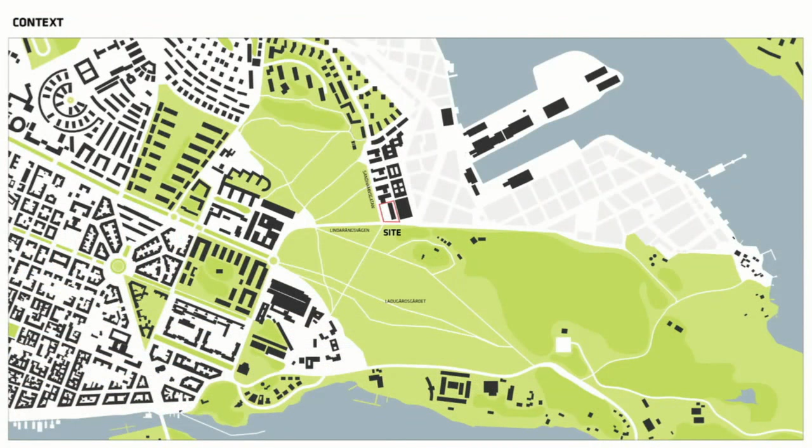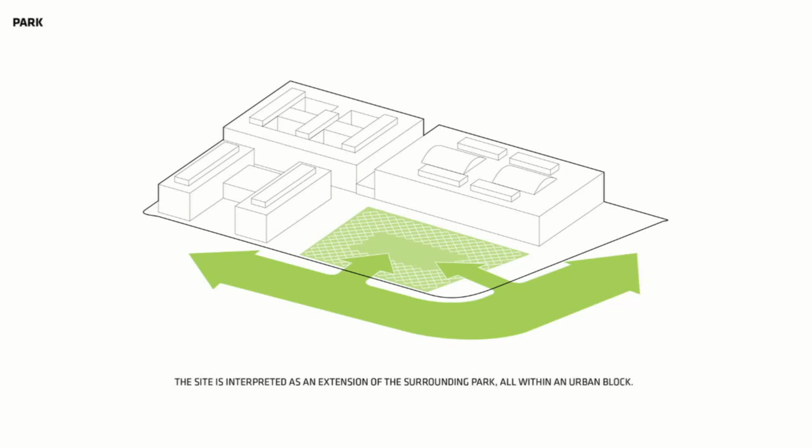And of course, I'm very happy to be here because after 18 years of practice, we have finally built a building in Sweden, thanks to Oscar, who called us 7 years ago and asked us to take a look at this incredible piece of land surrounded by Gärdet Park on two sides, city on two sides. It became very simple that we wanted to try to make a new kind of neighborhood, a new kind of city block that combines the qualities of the park with the qualities of the city.

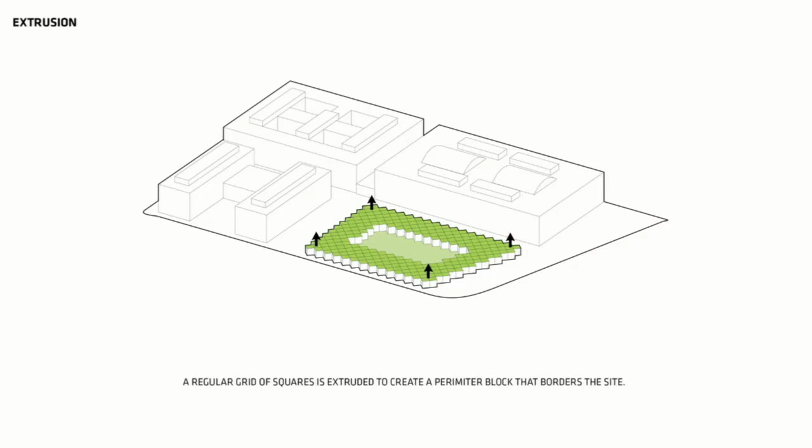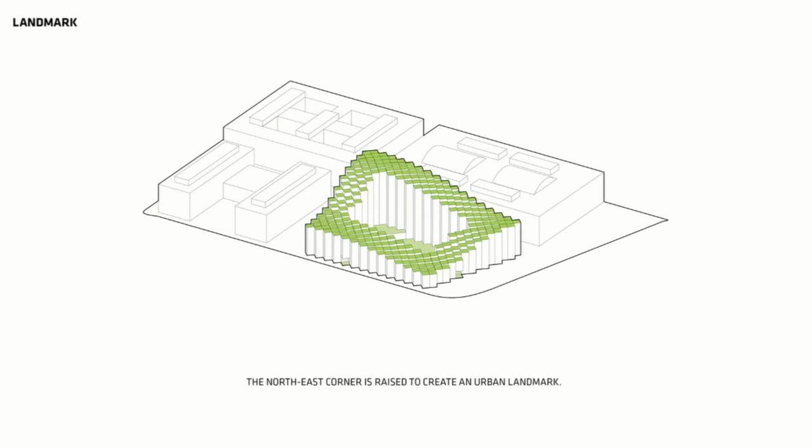So we came up with the idea of this sort of rotated grid, a grid of rooms. The rooms are rotated 45 degrees, allowing views up and down the streets. Passages allow a shortcut across the corner. And then we proposed to push down the southwest corner, lifting up the northeast corner in return, allowing us to flood the courtyard with daylight.

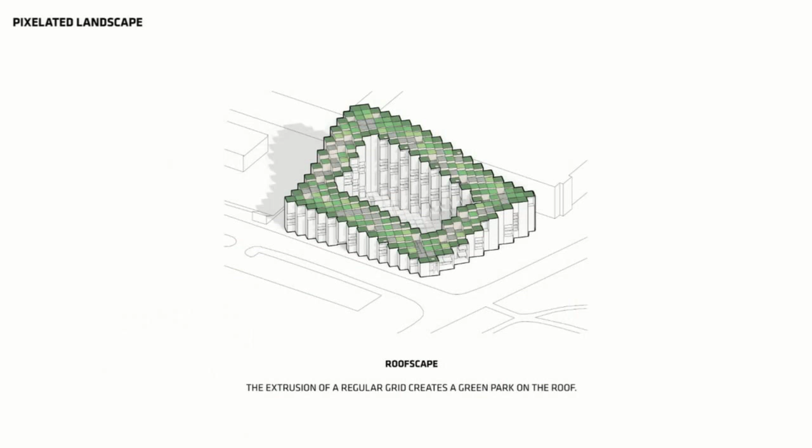This is what it looks like today - a gentle, lazy, sloping landscape. You have the gardens along this cascading landscape, and you have the oasis protected from the wind inside.

Everybody ends up getting a really joyful view over the Gärdet, over the forest, the hills. The landscape is not just visual, it actually has these cascading terraces. Inside, the courtyard becomes an oasis open to the sky, dipping down so you get an abundance of sunlight. And this is also the home for a kindergarten.

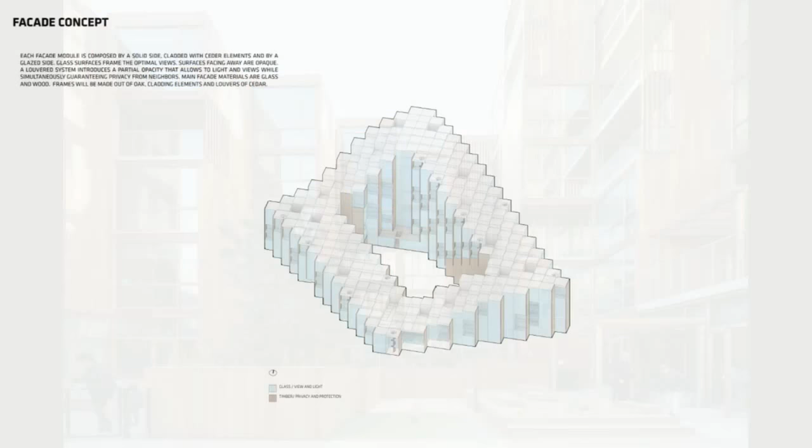For the facades, of course, they have different orientations, and we wanted the zigzagging to create a certain intimacy. Instead of being like some kind of address in a big block, you have your own little niche. Each balcony has its own little surroundings, responding to the attractiveness of the views and the exposure to the sun.

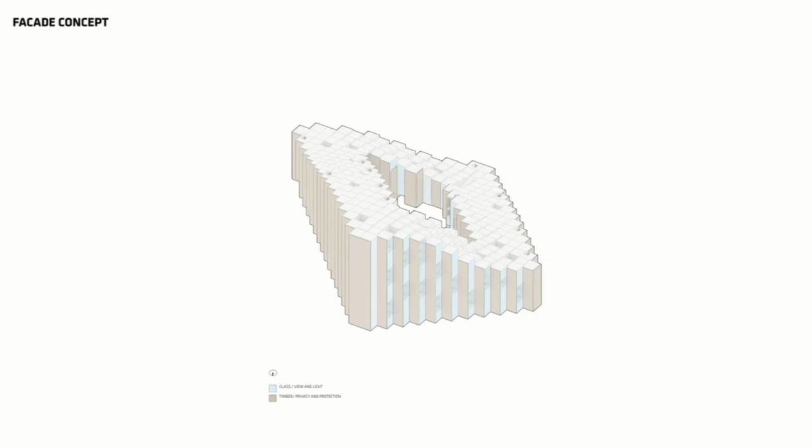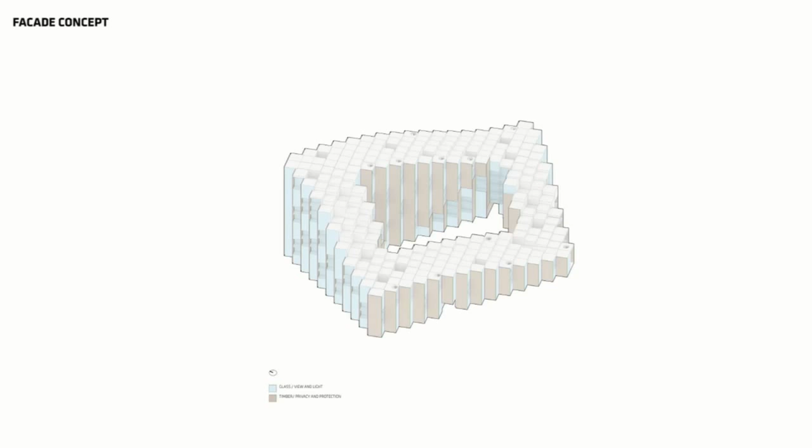For instance, from the northeast, it's almost entirely opaque. Even so, all of the facades are roughly 50% open, distributed to match the surroundings. Also in the courtyard, to avoid vis-a-vis, you get this kind of shade running across the facade. The closer you get to the corner, the more the nice view becomes the other direction. So here you see some of these situations.

And the facade is entirely clad in wood. We like the idea of combining elements that you normally see as opposites, like the countryside and the city side. When you go to the countryside of Sweden, all Danes from Copenhagen have a country house there, including my parents, and they're all made of wood. So we thought it could be interesting to apply this material, normally seen at small scale, to the city scale.

Sometimes the louvers are turned to allow views from the balconies while retaining privacy. But of course, from the southwest, the facade is almost entirely glass.

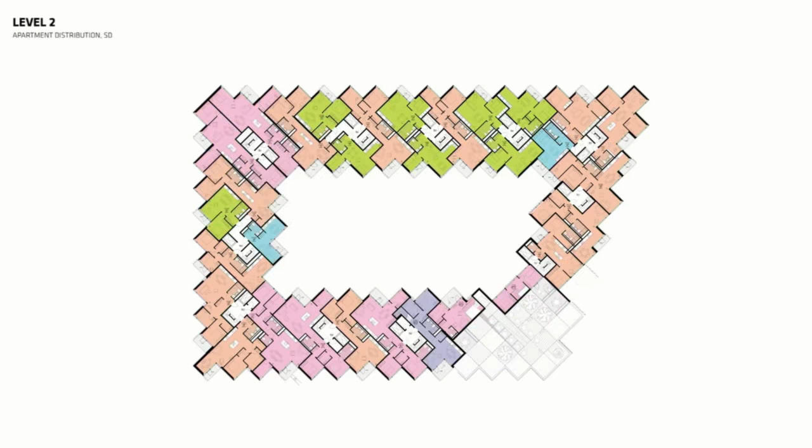So basically, when you look at the plans, in all this organic appearance, it's actually incredibly rational. It's like a single module repeated indefinitely. But as a result, you get apartments with an almost quirky character. Quite often when you move into a newly built apartment, it's so simple that it's almost like a cardboard box. It lacks character and diversity.

Here, with access to the outdoor spaces, you can see the steel is actually exposed inside, so you have the quirkiness you find in a loft converted from industry to living, similar to our own office. There's the warmth of light filtered through the wood, and even a certain verticality. Many of the apartments are duplexes, and some have access to the roof through these spiral stairs.

So essentially, you end up inhabiting a hybrid part of Stockholm that is half landscape, half city. And I think maybe the one image that best captures the intention of the project is this image on a day similar to today, where you can hardly see where the natural landscape, the rolling hills and the forests, become the city of Stockholm.

Before I leave it over to Reinier, I thought it could be interesting to run through some of the subjects or challenges that we've been dealing with over the last decade and a half at BIG.

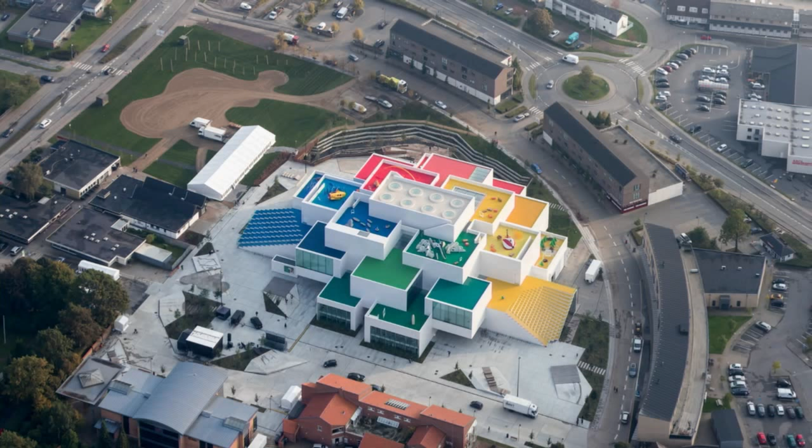We recently completed the home of Lego, the Lego House. The success of Lego is that everybody thinks Lego is from their own country, but it's not, it's from Denmark. We tried to make the house as Lego-like as possible, to make it interactive and inviting.

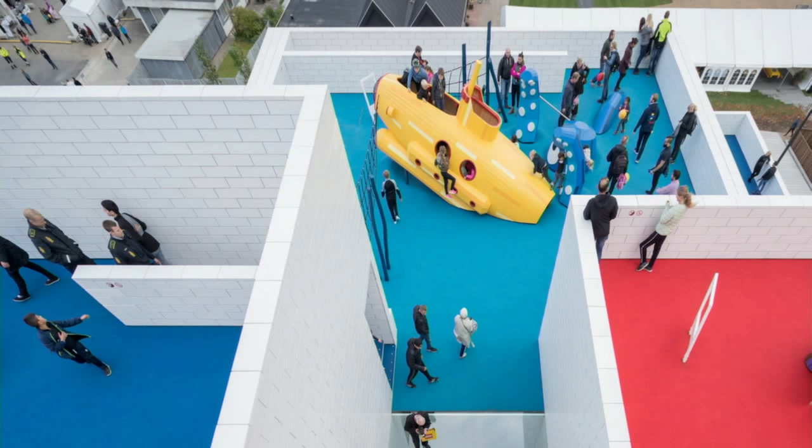You can actually climb the roofs on these playgrounds, all the way to the top, and you don't need a ticket. It's really an extension of the landscape of the city of Billund. Inside, you have all these rooms dedicated to different aspects of Lego. It's probably the only museum in the world where you have to touch the artifacts.

And the reason Lego is important to me is that Lego is not a toy, it's a tool. It's a tool that empowers the child to create his or her own world and to inhabit that world through play, and to invite her friends to join her in play and in co-creation of this world.

And at its best, that is exactly what architecture should be: that we as humans have the power to create the world we want to live in and make it a reality. As you know, those of you who are native Swedish speakers, the Danish and Swedish word for design is formgivning, which literally means giving form to that which has not received form yet. In a way, to give form to the future that you would like to see happen and that you would like to live in.

Essentially, I think we try to do this at different scales, at different sort of projections into the future. Some of the projects we deal with are more blatantly dealing with this.

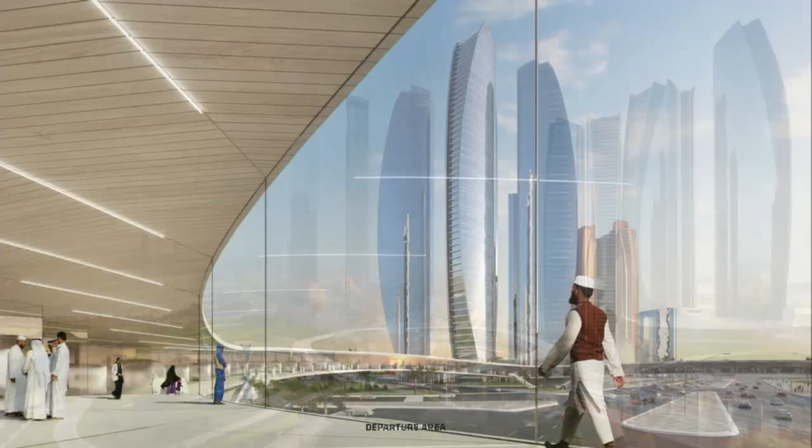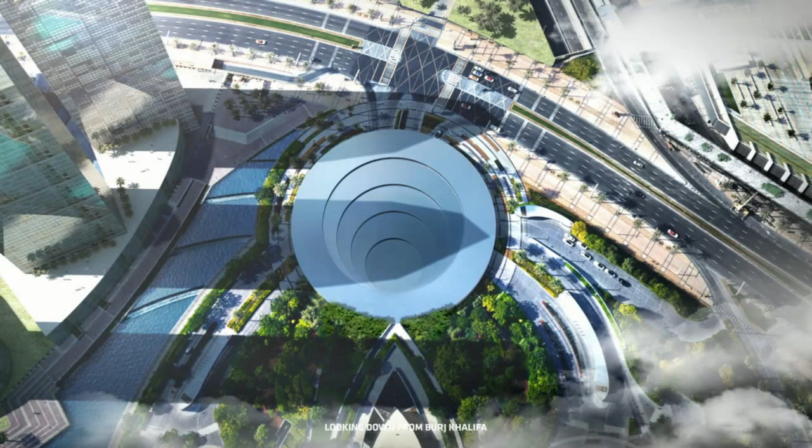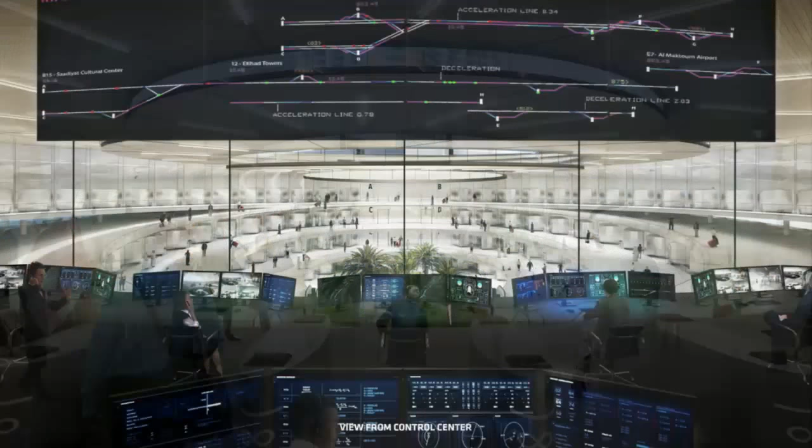We're working with Hyperloop, trying to imagine the future of on-demand, ultra-fast transportation. Among other places, we've made studies for the connection between Dubai and Abu Dhabi, allowing people to travel at supersonic speeds between the two cities, doing in 12 minutes what currently takes at a minimum 2 hours, and hoping to expand this across the entire region.

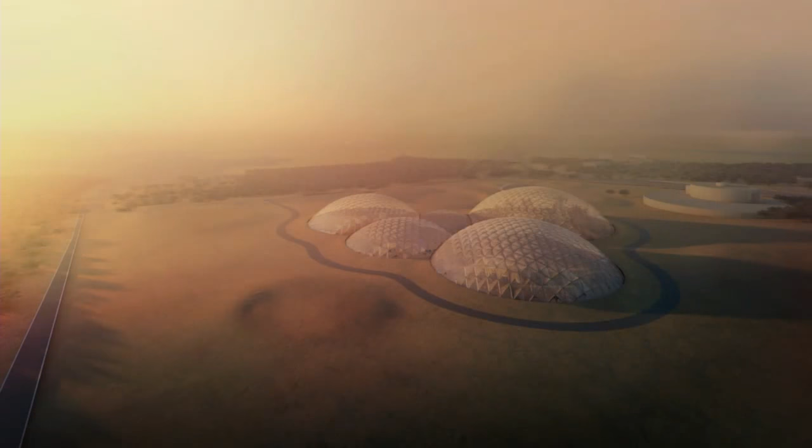In doing so, we started speaking with the Ministry of Cabinet Affairs and the Future in Dubai, and they commissioned us to do the Mars Science City, where we're actually creating a prototype of what a human habitat could look like on Mars in the not too distant future.

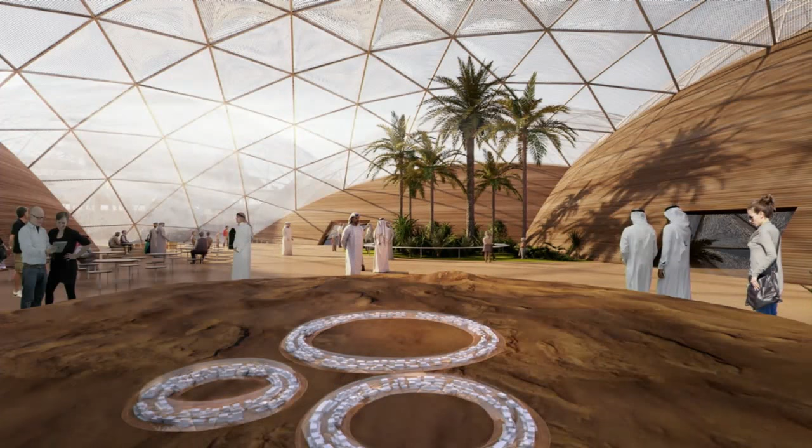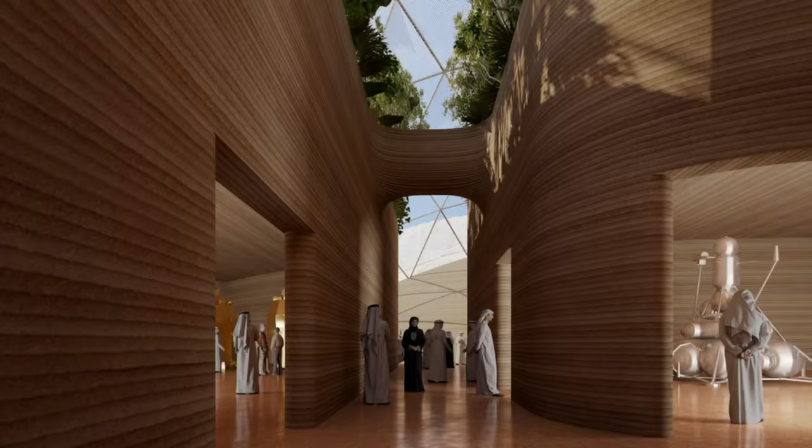Working with 3D printing, we use the local materials that are on site, in this case in Dubai, but also create this idea that living on Mars doesn't have to be like living inside a tin can. It can almost have this sort of Arabian vernacular quality. The texture of the 3D printing and the warmth of the sand gives it this kind of friendly feeling.

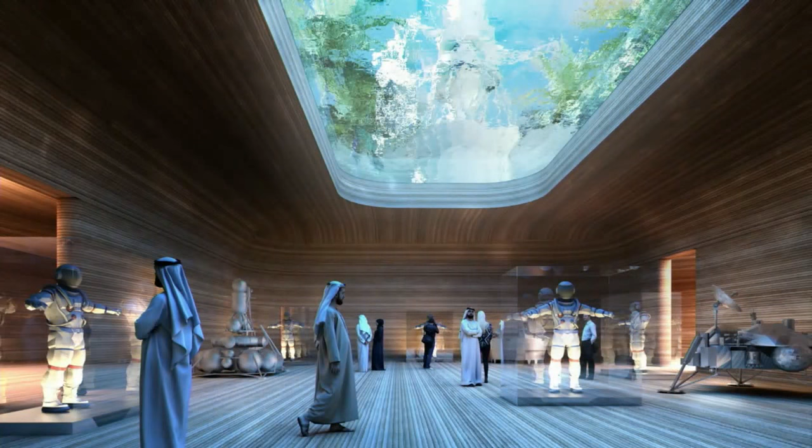Also, to protect from the radiation you have on Mars, the best way to shield the human body from radiation is water—it's 7 times more effective than stone. So just 1 meter of water that allows daylight to pass through can protect from radiation.

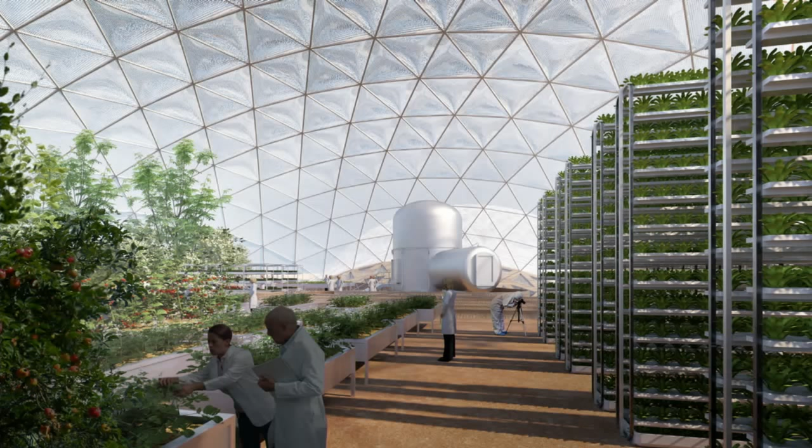So we're just starting to place images and understandings in people's heads of how attractive and desirable a future habitat on Mars could be, using aquaponics and hydroponics to create this lush environment, and using it as an exchange of knowledge before we can actually realize the real one, hopefully in the not so distant future on Mars.

But sometimes this idea of the future is much more intimate and much more near to what you know. Our first project ever was the Copenhagen Harbor Bath, as some kind of an idea of hedonistic sustainability—the idea that a sustainable city doesn't have to be this kind of Protestant idea that you have to take cold showers to not ruin the environment.

If you have a clean port, it's not only good for the fish, it's actually amazing for the citizens living there. You don't have to drive for hours to get to the beach—you can jump in the port in the middle of the city.

In Shenzhen, we recently opened the headquarters for the main energy company of Shenzhen. The facade is designed like a kind of pleated dress, almost like an Issey Miyake fabric, which means that it's entirely open facing away from the sun, and entirely closed facing the main direction of the sun.

And this simple idea, where of course we can play with and increase or decrease the scale of the openings and the main entrance, reduces the energy consumption by 30%, purely because of the geometry of the building. So in a way, what makes the building perhaps look beautiful also makes it perform beautifully.

In Copenhagen, we've experimented with different hybrids. The Mountain combines a parking structure with 80 houses with giant gardens—a man-made mountain.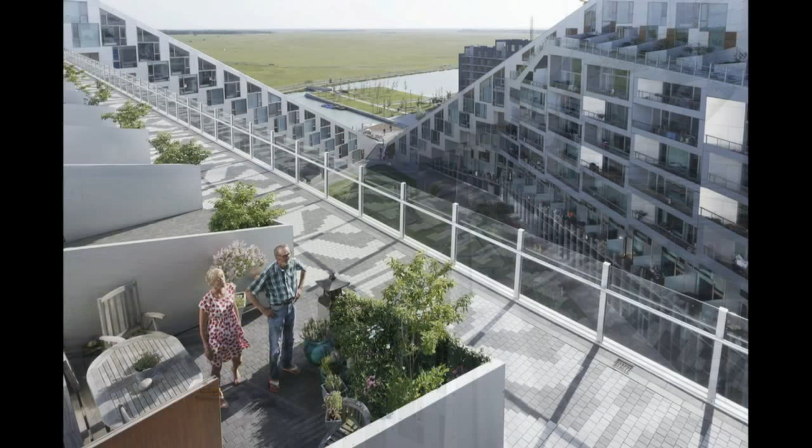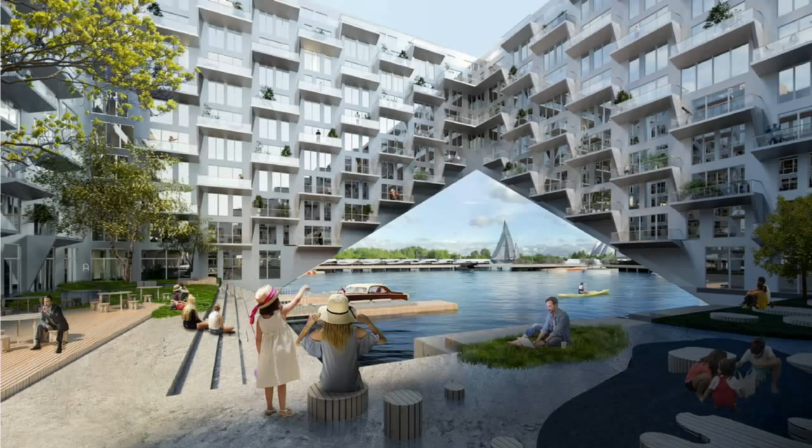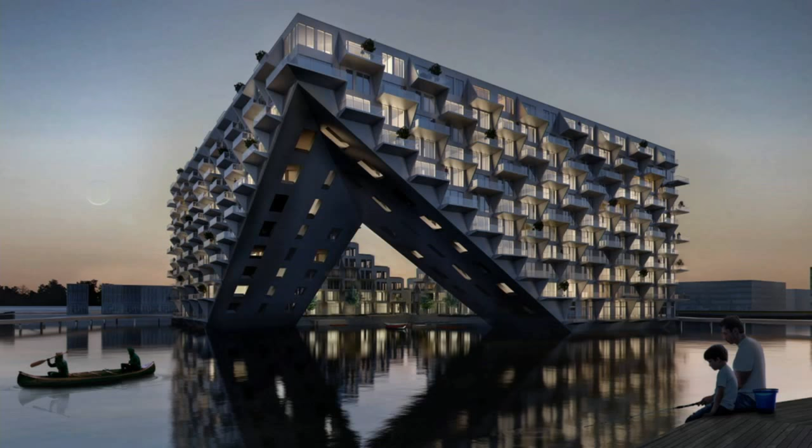As a sort of architecture, is also an ongoing conversation with the world and with your own practice. For instance, the 8 House in a way inspired a building we're now building in Amsterdam. It's almost like the 8 House upside down. It's basically a city block that allows the port of Amsterdam to extend into the courtyard.

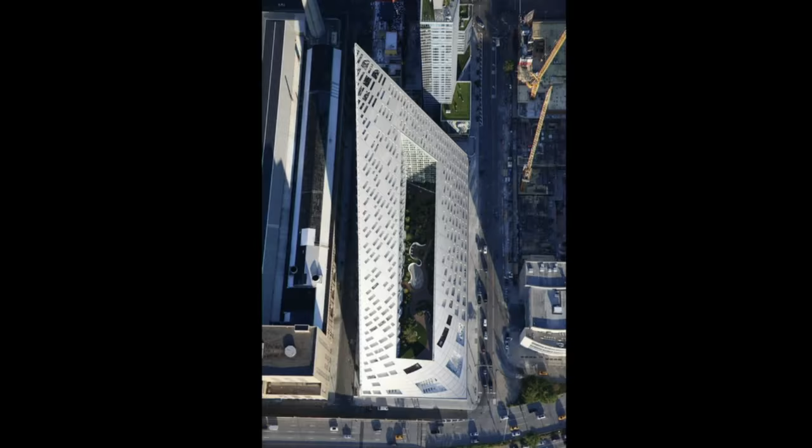So you can actually sail, if you have a good aim, you can sail your sailboat into the courtyard. And as another kind of American cousin, we created Via, which we've called a court scraper, because it combines the density and verticality of a skyscraper with the communal space of a Scandinavian courtyard. The courtyard actually has the same proportions as Central Park, only 13,000 times smaller. Sort of a bonsai Central Park, creating an oasis in the middle of Hell's Kitchen.

And then maybe the last class of projects is to leave you with one idea. You're only going to get half of it, because I had a film with all kinds, but there's no sound. And I think to make it like a silent movie would also be really weird. But...

A notion we've called social infrastructure. Social infrastructure used to be a term that means like how many kindergartens and nursing homes there are in a neighborhood. But we try to mean it much more literally. We all know that a piece of infrastructure, once it gets decommissioned, it can become something else, like the Tate Modern, which used to be a power plant.

We created the Danish Maritime Museum. It's right next to Hamlet's castle, Kronborg. Kronborg became UNESCO World Heritage, so they had to put the Danish Maritime Museum somewhere else. It used to be inside the castle. So they said, why don't you put it in the dock where they used to build ships?

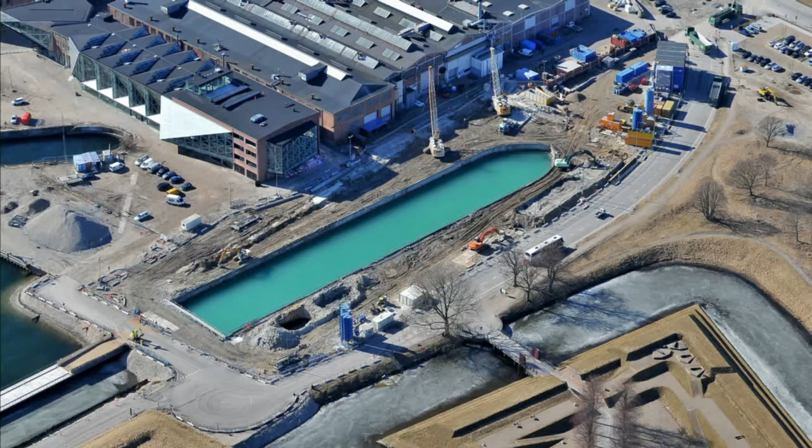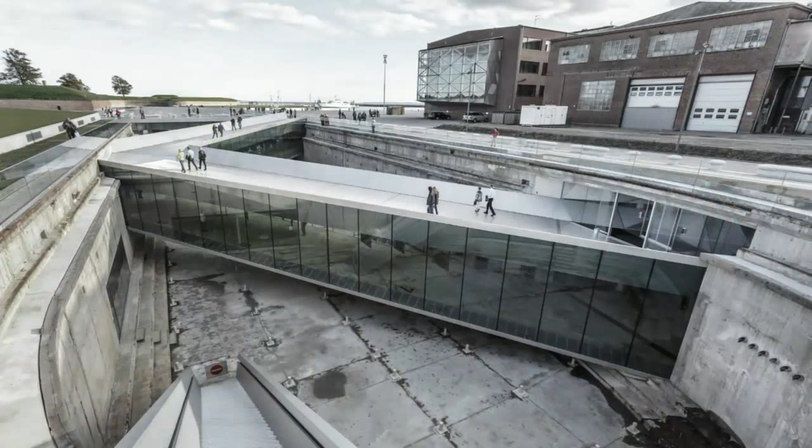So we thought, what if we turn the dock inside out, use the museum to preserve the dock. All we have to do is design three bridges: one that stops water from coming in, one that connects to the castle, and then one that gently slopes down into this sort of underworld of the maritime industry.

So not only is the space inside part of the cultural infrastructure of the city of Elsinore, but the dock itself, with the hard walls and the open ceiling, has amazing acoustics for live performances. So basically it has been reinvented to have a new purpose—this sort of inverse Titanic moment.

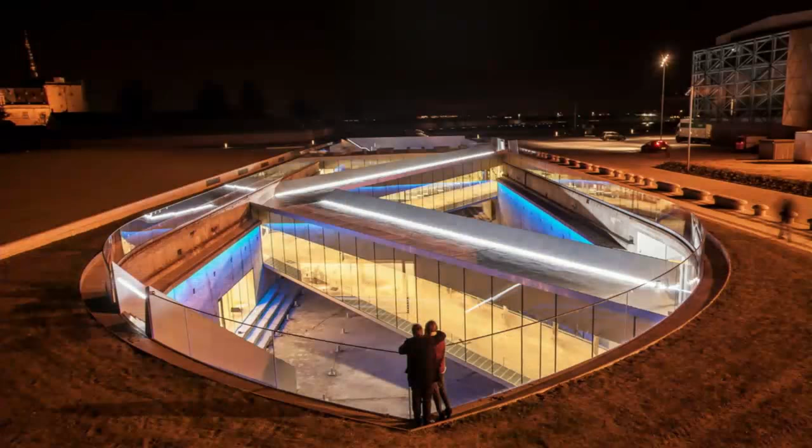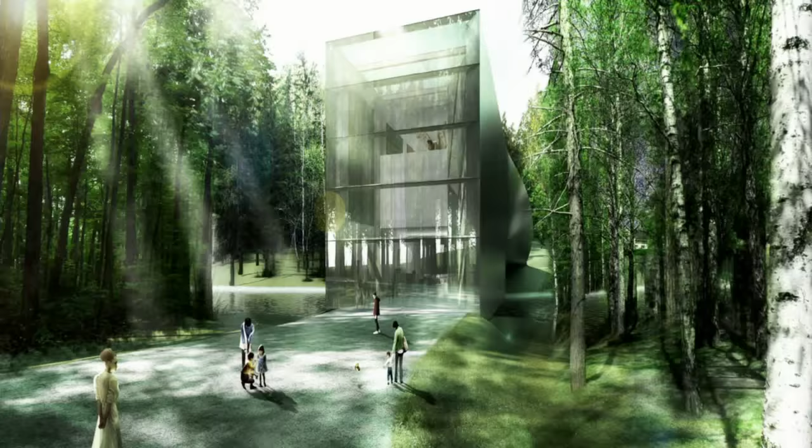But also, if a piece of infrastructure like a dock can become a museum, you can also go the other way. We're building a museum in a sculpture park in Norway that opens next year in Kistefos outside Oslo. We could place the museum anywhere we wanted, and since you have sculptures on both sides of the park, we placed the museum as a bridge, so it becomes part of the journey as you stroll through the sculpture park. You suddenly find yourself moving through the museum and over to the other shore.

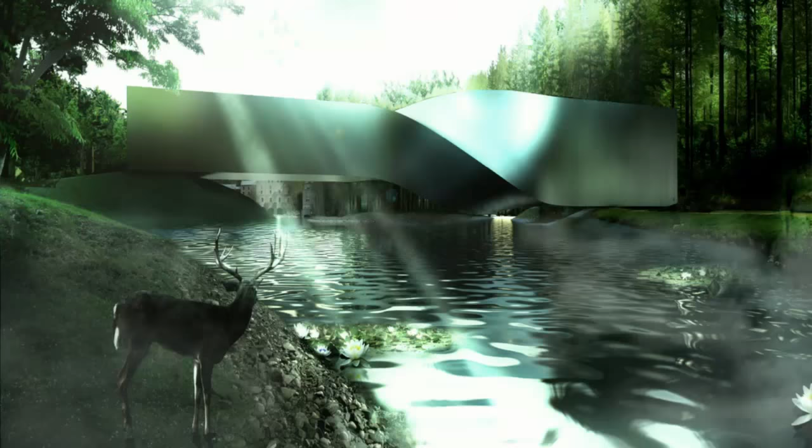But when you see it from elsewhere, you actually don't even recognize it as a museum. You can almost see it as the biggest sculpture in the sculpture park.

And as a last idea, since there are these different interpretations, maybe you don't have to wait for a piece of infrastructure like a power plant or a dock to get decommissioned before it becomes enjoyable. With the power of more environmentally progressive technology, it can actually become so clean that the negative side effects of, for instance, a power plant can evaporate.

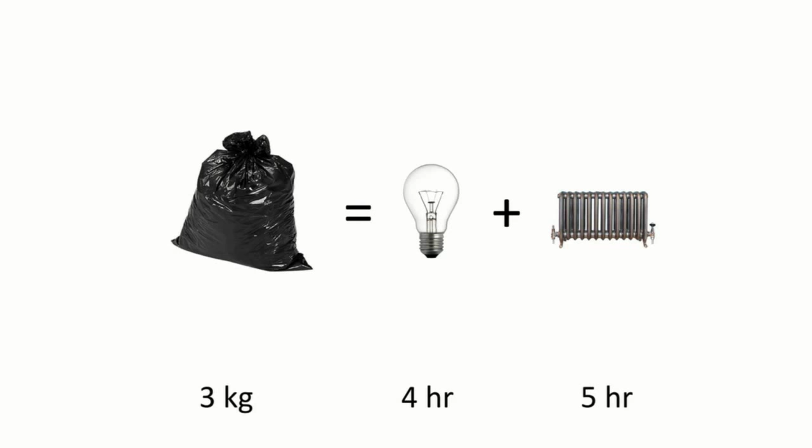So we thought, how can we celebrate this fact? In Denmark, we have snow. We have absolutely no mountains—apparently, we have mountains of garbage. So to ski, notoriously Danes have to go to Branäs.

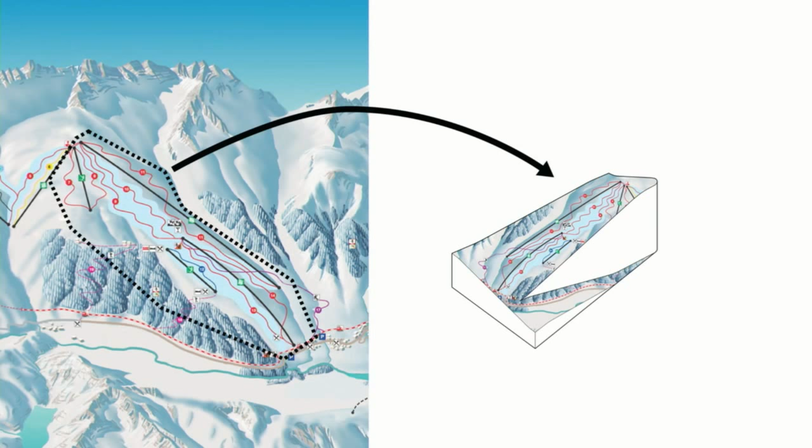It's our closest ski slope. It's like 6 hours in a car, and it's not the biggest alpine ski resort in the world, as you probably know—I think no one from Stockholm has ever been there. But we found out that because of the scale of the power plant, we can actually create two-thirds of Branäs on the roof of the power plant.

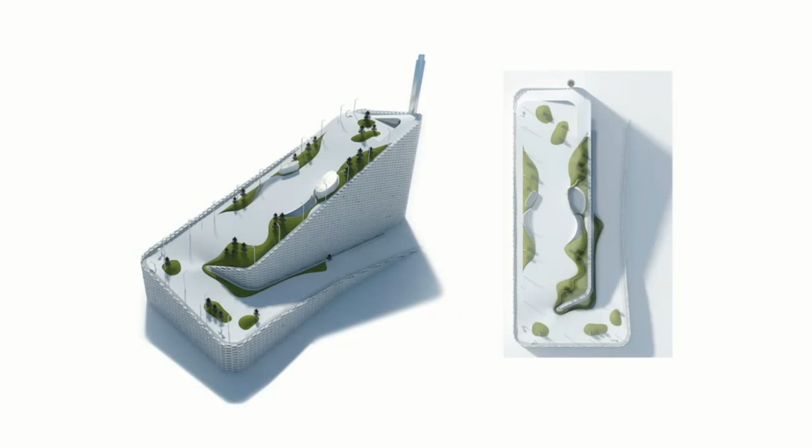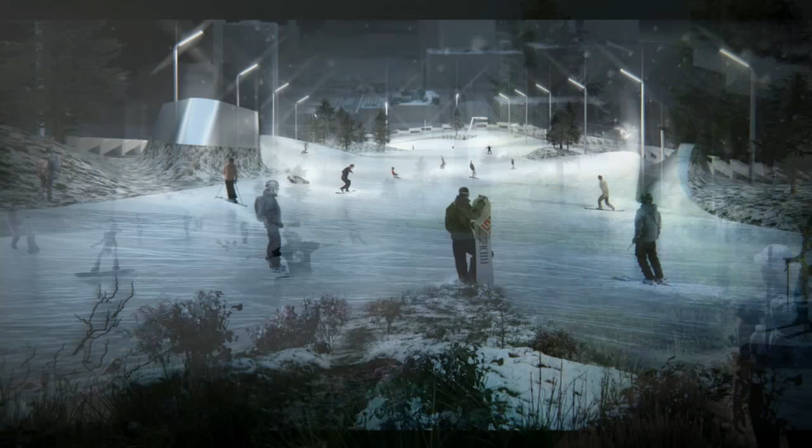We proposed it in a competition. Miraculously, we won the competition, so we had to somehow deliver on the idea. Also, Denmark won 0 medals in Sochi—we hope to change this now, because now we can actually practice at home.

It's going to be a public park, free for all. You can hike in ways you cannot hike in Denmark. You can enjoy the views of the otherwise flat city of Copenhagen. You're going to have the tallest climbing wall in the world—100 meters of relentless danger.

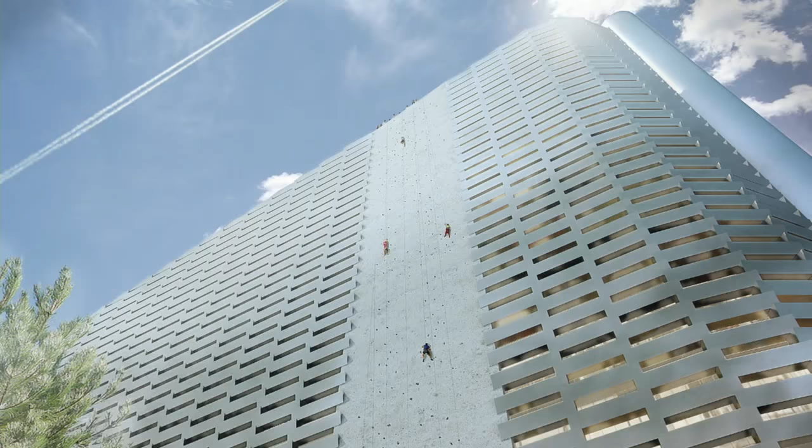It's basically creating, together with the city of Copenhagen, a man-made ecosystem. Because not only can we harvest local resources like rainwater, natural ventilation, natural daylight, but also with the citizens of Copenhagen, it forms almost like an urban metabolism that converts waste into a resource.

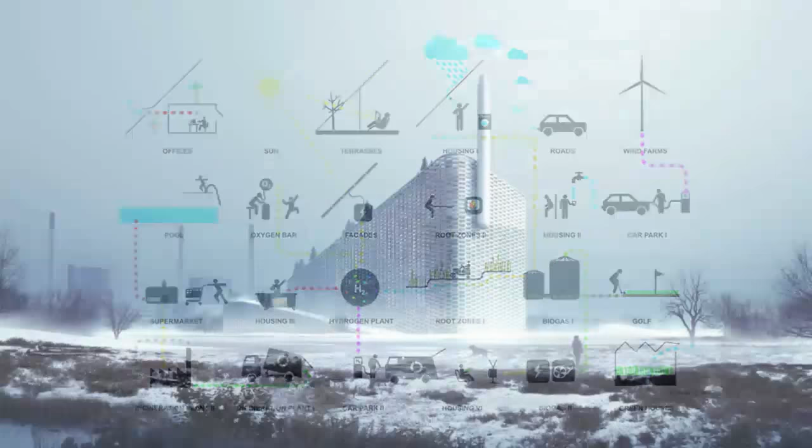This was our first vision, and this is what it looked like 6 months ago. It's scheduled to open right after the new year. So maybe we're going to have Swedes coming to Denmark to do alpine skiing sometime in the future.

Ending on this, I think there is a certain point here, and that is that as an architect, you also have this possibility of giving form to the future. Of course we're not manufacturing the future; we are accommodating it.

The future is happening on its own, the way people behave. There's always things changing, like demographic change, an aging population. It can be a cultural change, people migrating to different places, technological change, new technologies with new possibilities. But whenever the world is changing, the way we used to organize it doesn't fit anymore. You get cracks in reality, and those cracks become opportunities to give form to the future.

Normally you would want to be as far away as possible from a power plant because it's polluting and it's noisy. Now with clean technology, you can actually have probably the most exciting park, at least in Copenhagen, on top of a power plant. And in that sense, architecture is really world changing, because I'm getting my firstborn son in 3 weeks.

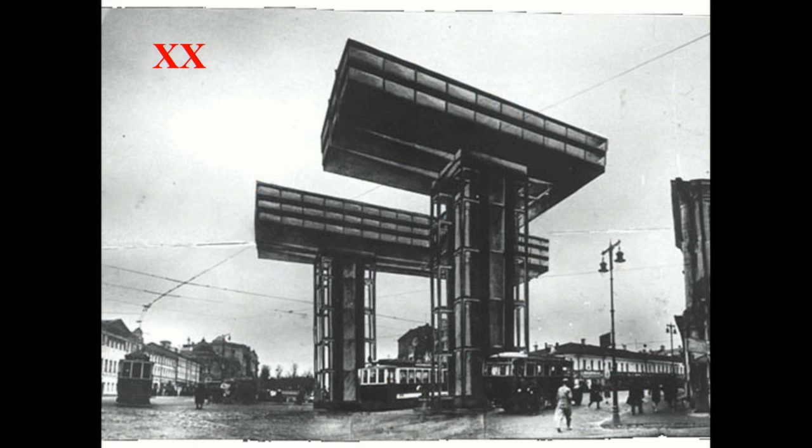It goes on—the University of East Anglia, don't know who this is. And I'm going to say some pretty horrible things, but nothing is personal. To prove that: this is Moshe Safdie in the 20th century, and this is a building nearby. The good thing about that building is that it's actually not the reincarnation of Safdie alone.

It's the reincarnation of many things—of brick without being brick, of the Sirius building in Sydney by Tao Gofers. There it goes into the skyline. And in an utterly presumptuous moment, it also owes a lot of its idea to Kisho Kurokawa. So one could say that modernity triumphed.

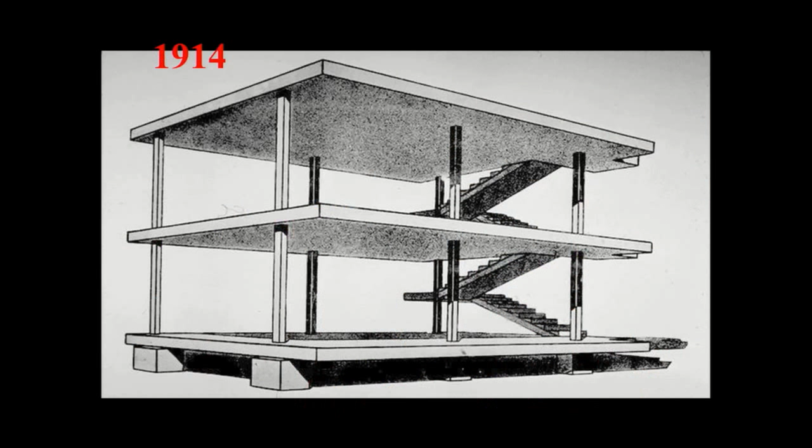This is the launching pad of modernity, the Dom-ino by Le Corbusier, launching a whole set of freedoms—exploring the freedoms related to reinforced concrete structure, no longer bearing walls, columns, a free plan, a free facade. That plan is now universal. It has triumphed, as you can see here—it's built physically.

But the unfortunate thing is that, strangely, this is a picture from a Greek website which is not about architecture—it's about the many tax breaks you can get from leaving a building unfinished. So the modern paradigm actually exists in this day and age as a tax break. And so the triumph is doubly edged.

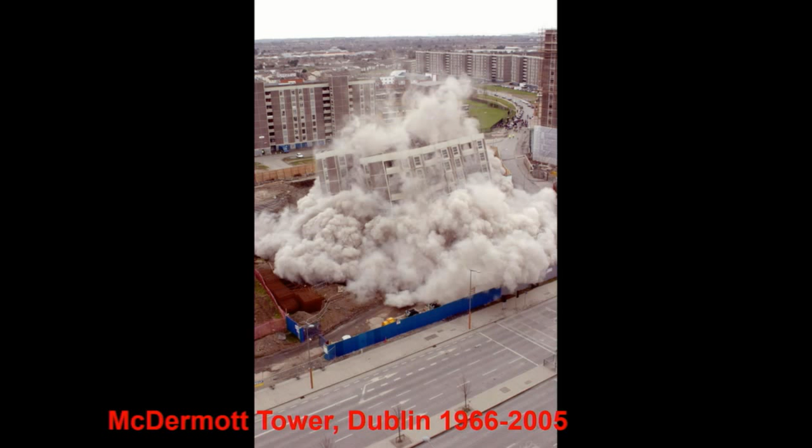It's very good that there is a reincarnation of buildings from the 20th century, because a lot of buildings from that century have disappeared. The first one: Pruitt-Igoe, 1972. Lyon, Sheffield, Chicago, Einstürzende Neubauten, Naples, Paris, etc.—I could do this all evening, but it ends. Nantes, France again; Belfast, Glasgow, Lyon, Vitry, Glasgow again, Frankfurt, etc. A lot of stuff disappears, so it's good there is a recycling—a form of new architecture that preserves the buildings we demolish.

In the Middle Ages, we built for 500 years, then in the 19th century for 200 years, and then 50 years. More recently, we built buildings that are supposed to last for about 20 years, and it is not imaginable that time will overtake the expiry date of buildings. So the planning from a prospective activity becomes a retrospective activity. In other words, you do not plan the construction of a building, you plan its disappearance.

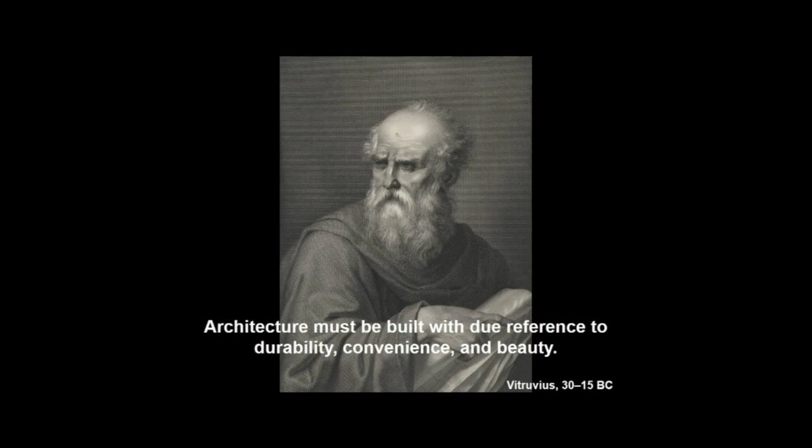It's just a little theory, and it's a theory that is completely antithetical to the 2,000-year-old philosophy of architecture. This is Vitruvius. His main pillars of architecture: durability, convenience, and beauty. And that ethos, regardless of the stylistic changes, hasn't changed over the centuries here.

Alberti celebrated the eternal nature of architecture. Ruskin celebrated the fact that buildings should last for more than one generation. And even a contemporary icon like Frank Gehry talks about timelessness. But how apt is that ambition? And how true to the current times is that ambition?

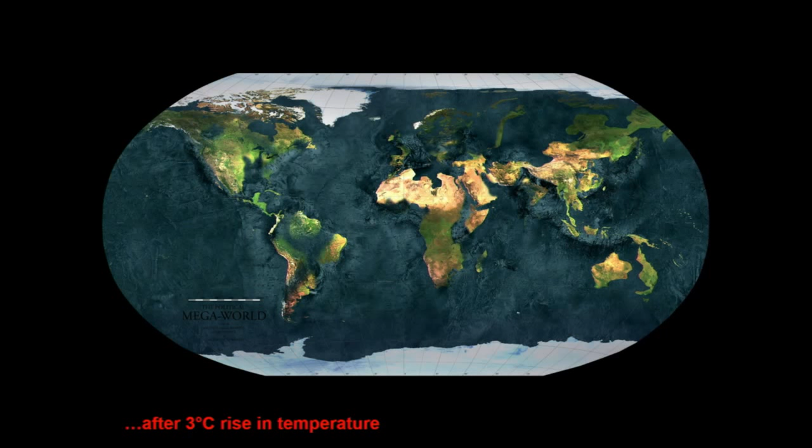Because there are two major trends that currently dominate the world, and everybody deals with them: climate change and urbanization. The climate change effect is well known—if Al Gore is right, you can visualize that a smaller part of the world will remain. But there is another inconvenient truth running in parallel, and that is the trend of urbanization.

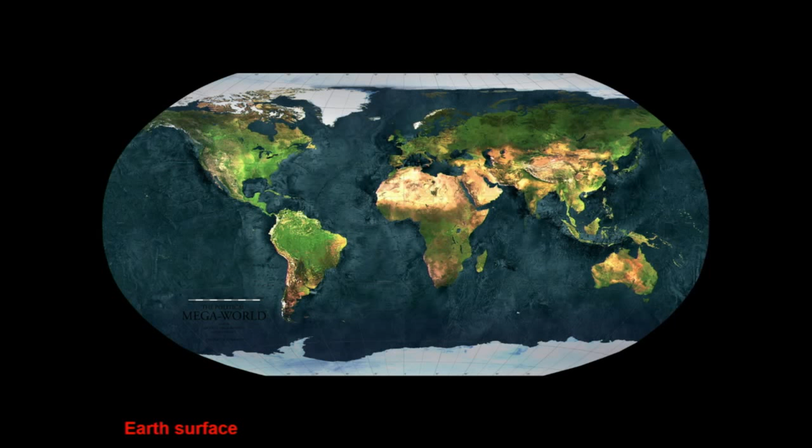This is again the same world map, this is the Earth's surface. This is the part of the Earth that has more than 25 people per square kilometer, more than 50, more than 125. This is in a way the megacity regions in which more than half of the global population lives now—about 3% of the Earth's surface, with nearly all of its population living there. So the world we know has shrunk. It's in a way an archipelago of megacities. That is one way to look at the outcome of the trend of urbanization.

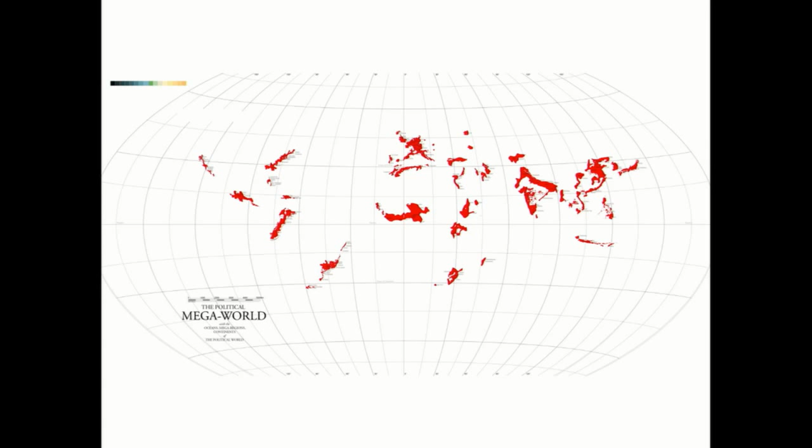There's one unfortunate thing: both trends are known, but if you juxtapose them, climate change and urbanization means that all future cities will be in the water, protected at enormous costs with increasingly bigger sea defenses. I live in a country that spends 1.3 billion a year on staying above water, and that's only going to become more. So I wonder, what are the consequences for architecture of this trend?

Is it time that the main pillars are re-evaluated? So not durability but temporarity, not a fixed use but essentially a building fit for any use, and a form of discreteness instead of beauty. In other words, this architectural ideal turns into this architectural ideal. It is important that a building can disappear—that's the main architectural quality, its disappearance. It should be used for what it was not intended to be used for, and essentially should be constructed at any given place, which is in a way a violation of the three classic tenets.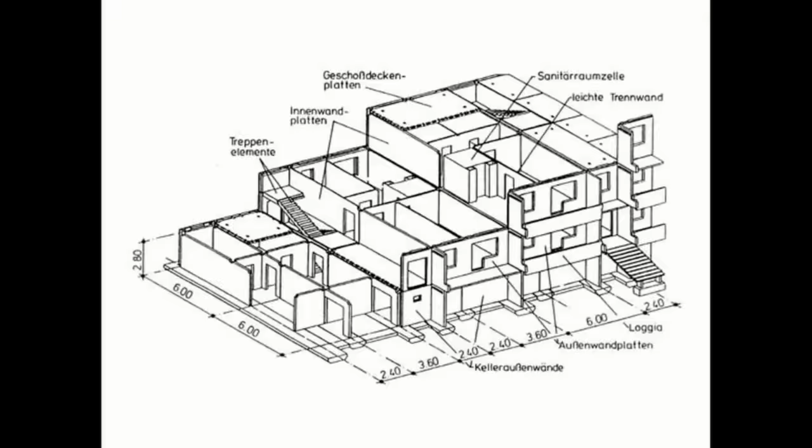This is Marzahn in East Germany. The interesting thing about the demolition is that it's playing the film of its construction backward, and you end up with the same spare parts, collected, shipped, and used for a different purpose, reincarnated in a different type of architecture, considerably more modern than the architecture it replaced.

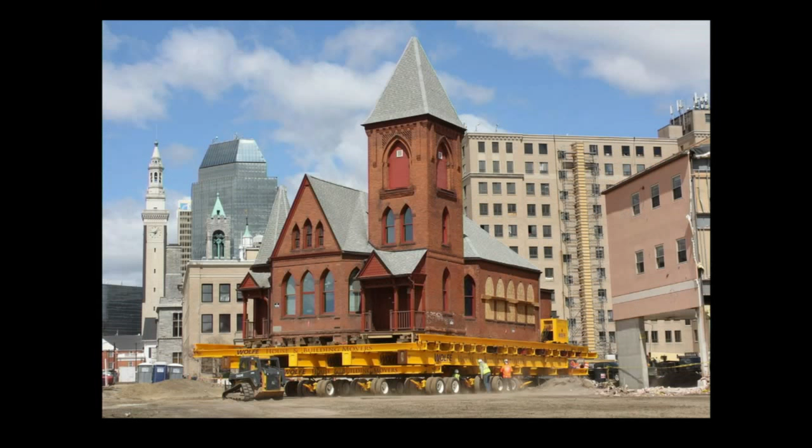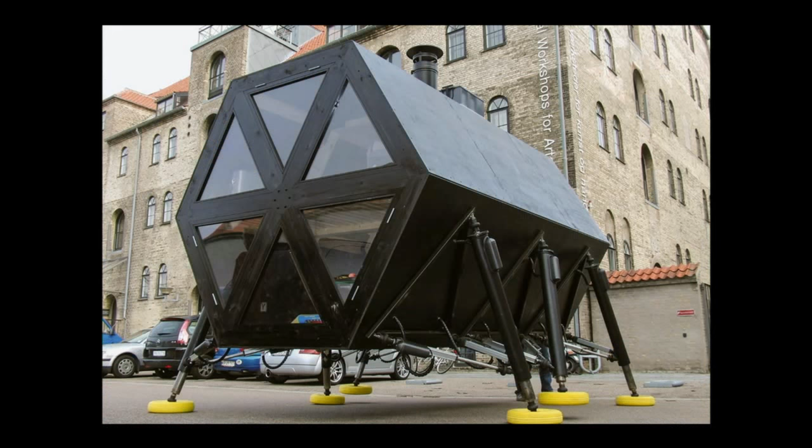In fact, again, a kind of placeless architecture, an architecture that's easier to move. You can move entire churches. Once you move things anyway, the means of transport and the real estate may as well merge into the same thing. So this is a truck as a house. This is a ship as a house. This is a kind of walking house, and maybe entire cities should walk, which is again a reappreciation of the Ron Herron thing from the 1960s.

But I think by far the most—I think I've lost everybody, no? Okay, anyway, I think the most interesting revolution of all is the following.

When buildings change hands, like the Gherkin in London, they triple or quadruple in value. They accrue value in an incredible way. That's part of the reason why a lot of housing has become unaffordable. So when fastighet becomes lösighet, we can perhaps mirror the Foster diagram and in a way get rid of property.

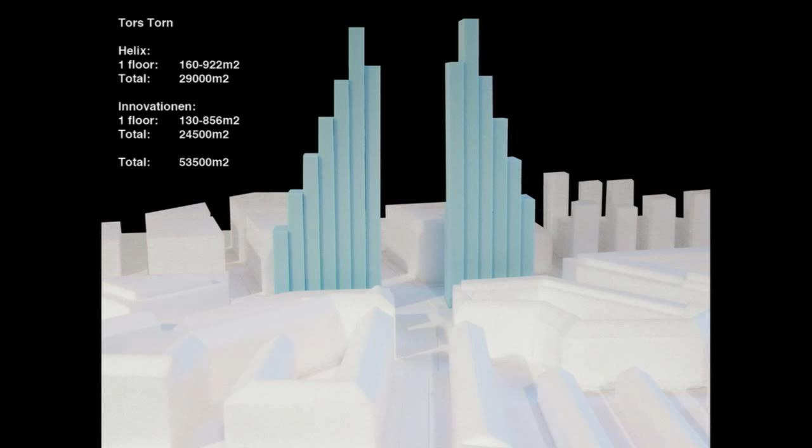This is a project we did in Sweden where we inherited an envelope from a previous architect, which we manipulated into a new form that became these buildings with panoramic windows, a recessed balcony, and the color palette, prefabricated. You sort of get it.

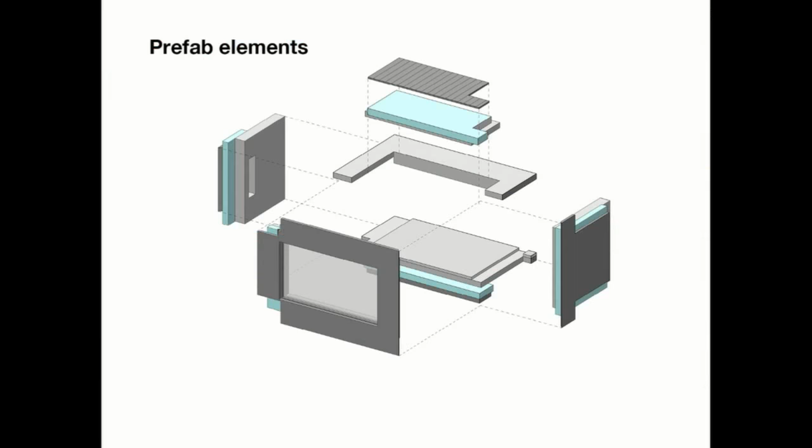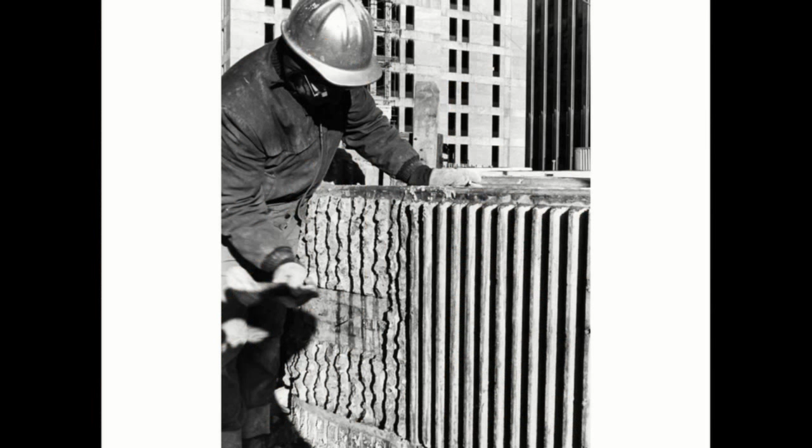Been fixed. The color corresponding to the colors of the neighborhood, obeying the prescribed palette of colors to be used in a system. Concrete that looks like brick, but actually concrete that is rough, a building that is rough, and things, there's panels, ribs, with brushed concrete, multicolored aggregate pebble finish.

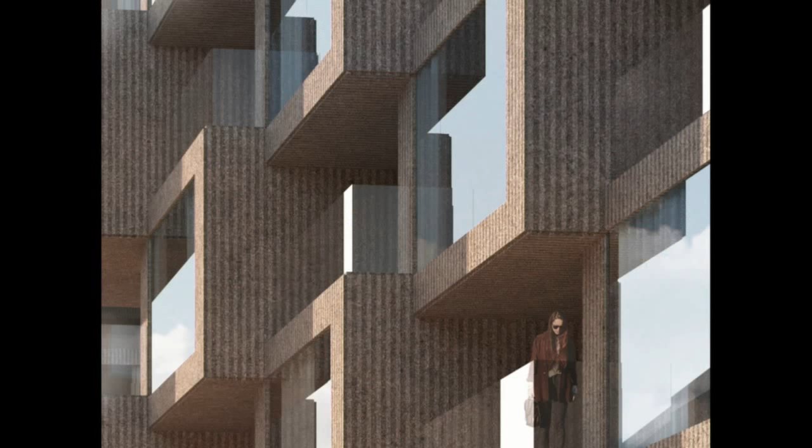And there we go, these are the renders, and the renders look like the building, which is a big triumph in this case. And there we go, up in the distance, and that was what I had to say. Thank you.